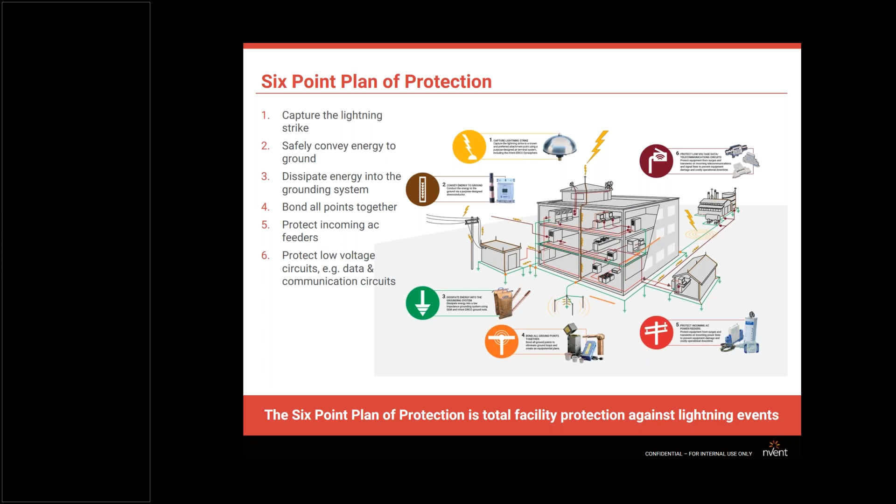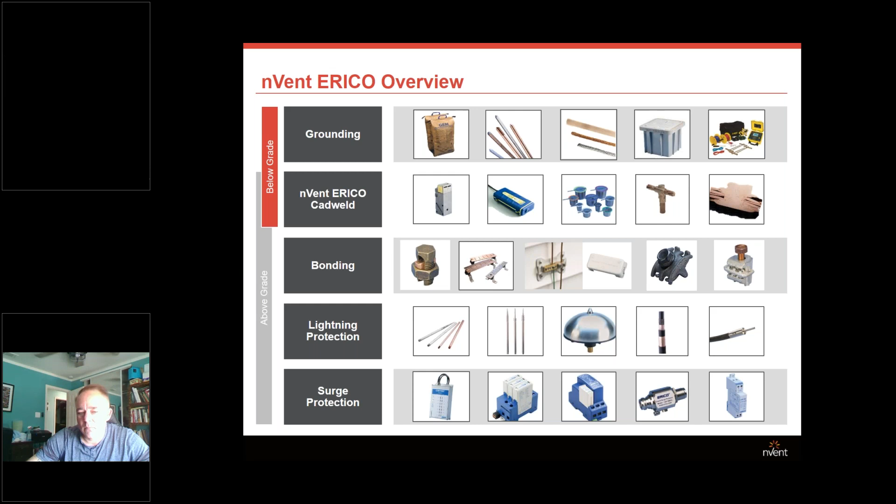And nVent ERICO offers all the grounding products, from the ground electrodes, the ground enhancement materials, the Cadweld exothermic connections. We offer the traditional blue tube and the new Cadweld Plus. We feature all the bonding products, which are your mechanical connectors and ground bars.

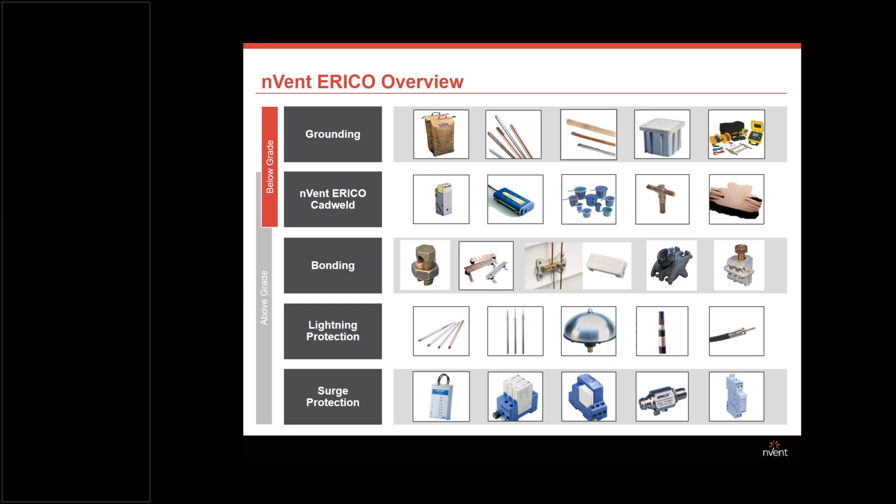We do the lightning protection, from what I mentioned a moment ago, from the Franklin rods to, the third picture there, the active lightning protection system, which actually sends out streamers to capture the lightning strike. And then we also offer the surge protection products from the facility entrance all the way to the datacom.

Grounding and bonding: why do you ground? Grounding is a connection, whether it's intentional or accidental, that grounds all the metallic and electronic equipment to the earth. And bonding is the permanent connection of all these metallic parts one to each other. So bonding is actually the joining of all the parts together. Grounding is where the energy is dissipated into the earth.

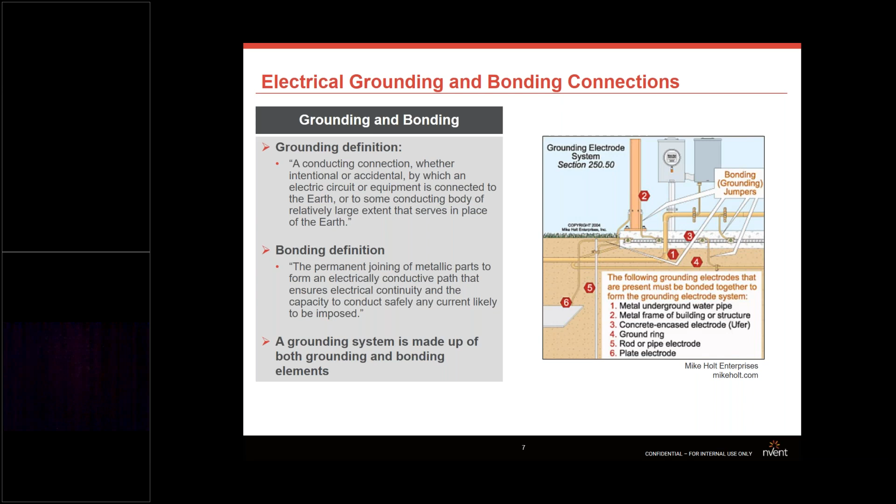And I'm going a little bit quick. We've got a lot of slides to go over. So please interrupt me if you have any questions, if I go too quick to make everybody understand. I apologize.

All right, Cadweld. A Cadweld exothermic connection is a process that welds copper to steel or copper to copper. It's an electrical connection caused by an exothermic process. It's a chemical reaction that releases the heat, and by releasing the heat, it's 4,500 degrees Fahrenheit. And what you get is a true weld where your conductors, or your conductor and the steel, the conductor and the ground rod, it actually fuses them together.

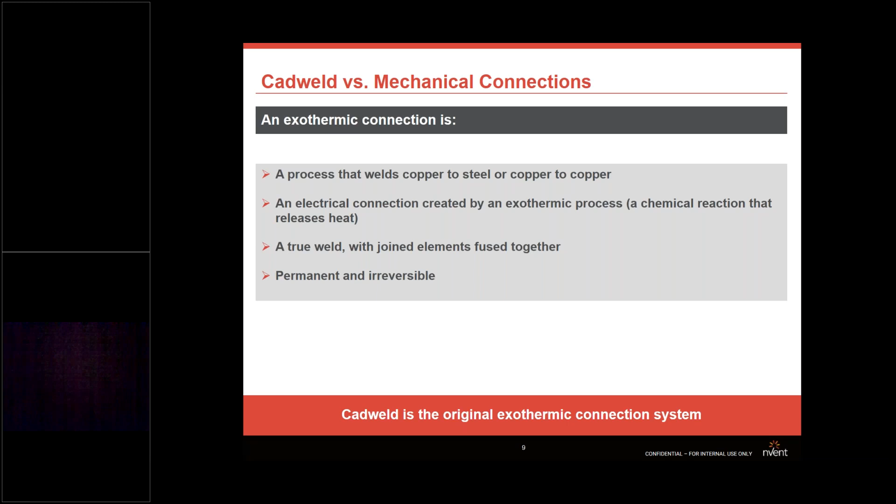So instead of making a connection, you're eliminating a connection. You have one molecular bond where everything is welded together in a solid copper connection. It is permanent and it's irreversible. The original Cadweld came out in 1938. It was invented by Professor Charles Cadwell. And all we did was drop the last L of his name and put a D to it, since it was a welding process.

And what we did was eliminate the one person having to take so much equipment onto a site. He was having to transport several hundred pounds of equipment to make this connection, and we cut it down to about 10 pounds of equipment. That includes the mold, the weld metals, the starters, everything. So we actually made it a lot safer, a lot easier for the person to do the connections.

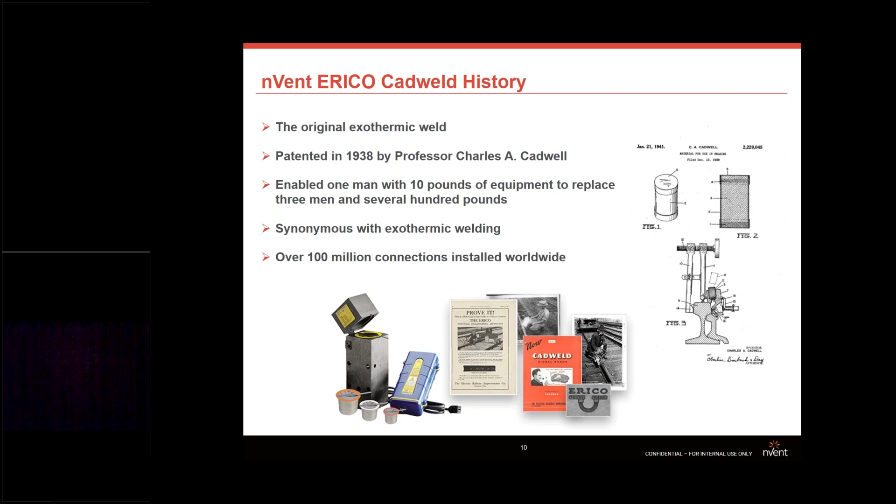And we are the Coca-Cola Kleenex of the grounding world. You'll hear a lot of people say, hey, I made a Cadweld connection, when they actually might be using one of our competitors. But we are synonymous with exothermic welding. We have made over 100 million connections worldwide of Cadweld installations.

Why do we Cadweld? There's no electrical power source needed. It's very lightweight and portable, like I just said. It's a very quick process. Until you see it made, it's a simple process, yet it's a very technical process. And it's the only way to weld copper cable.

And once you Cadweld two conductors together, they have the same current carrying capacity, so usually the connection does better than the conductor does. It is a permanent connection. It will not loosen or corrode, and it can be visually checked for quality, which is very important for the electrical inspectors.

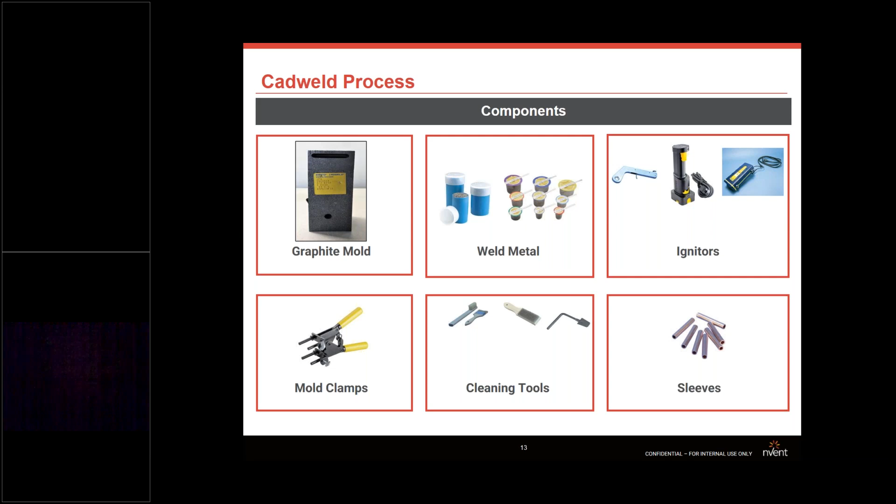And the blue tube, the old traditional Cadweld process: once the conductors have been placed in the mold and it's closed properly, you insert a disc, the weld metal pours in, and then at the bottom of the tube is a starting material, which is the same weld material. It's just ground much finer. You have to tap the tube, pour some into the weld metal and some on top of the mold.

You use the flint igniter, which is about 6 inches from the spark. It's about a 500-degree spark to ignite the weld metal, and then that will ignite the aluminum. The aluminum ignites the copper, and then as you see, as you open the mold, you have nothing but a solid copper connection of the conductors.

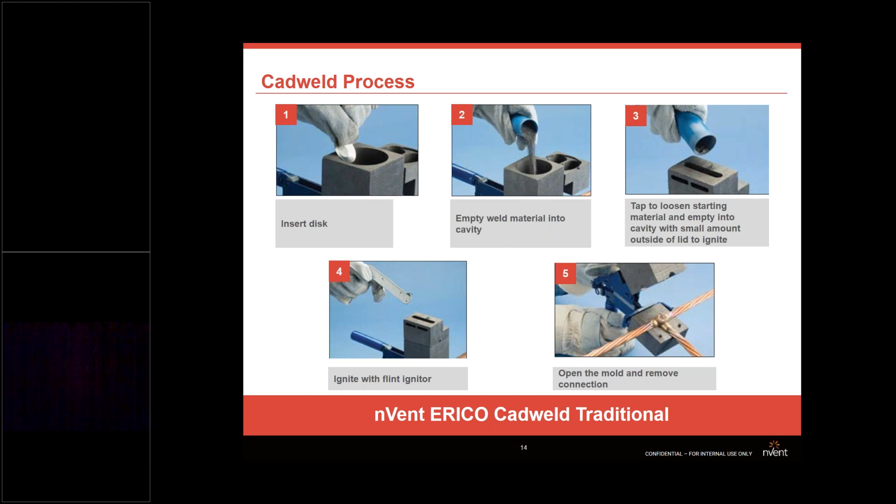The Cadweld Plus process is a much safer, cleaner process. The weld metal comes in a cup, looks much like a Keurig cup, and it has the igniter strip on it. The same process, you close the mold with the conductors in it. You drop the weld metal cup in. The strip inserts into the leads of the control unit.

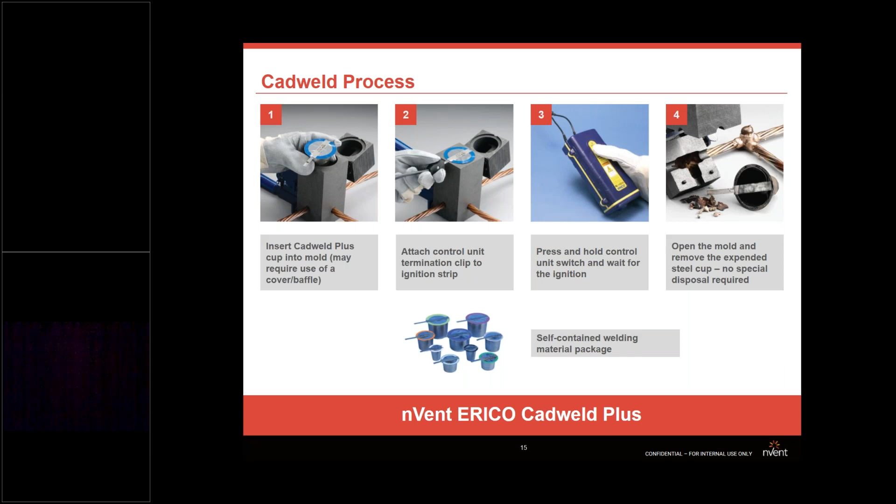Then you press a button for about 5 seconds for it to build a charge, which is a built-in safety feature. When you're making the connection, you don't want to accidentally bump the start button and have it go off and ignite the weld metal. So you have to hold it down for it to build a charge. Then it ignites the weld metal, and you have the same connection as you do with the blue tube. But you can be 6 to 15 feet away from the ignition, instead of 6 inches.

And then the OneShot has been around since 1959. It is exactly what it says it is. It's used one time. This is very widely used in the telecommunications industry. It's usually for a ground rod to a conductor, and the body is ceramic. It is not made out of graphite, so it is used one time, and then you can either break the mold off or just leave it on, whichever the electrical inspector prefers.

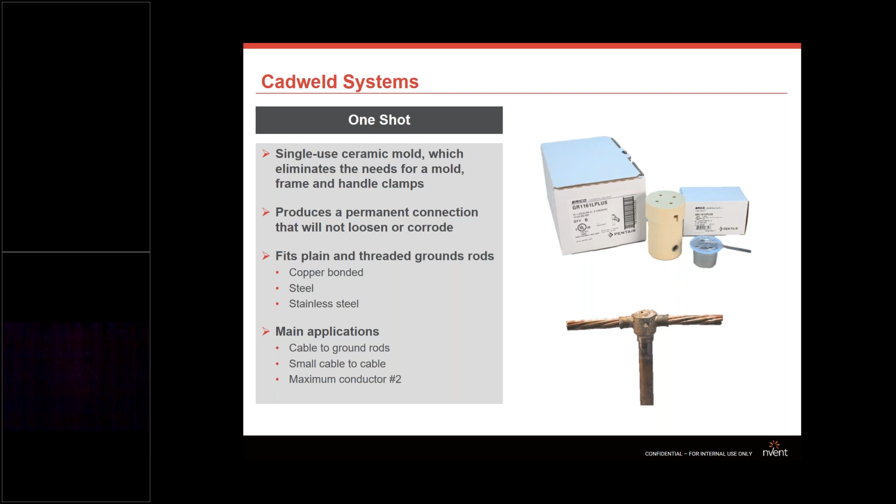And the ignition systems, like I mentioned previously, are the flint igniter for the traditional Cadweld and the control unit for the Cadweld Plus.

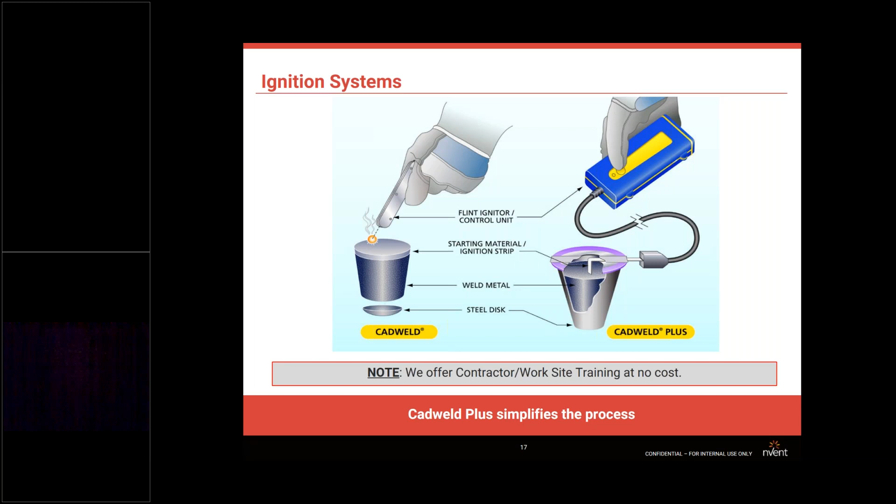Excuse me. The tools and accessories are the handle clamps, which are very important because we've had several instances where we have been called by contractors and end users who were having leakage issues. And a lot of the time they were not using the handle clamps. As you can see in the picture there, there's a clip that comes with the mold. That clip is for shipping and storage purposes only. That is not to hold the mold in place for making the connection. So the handle clamps are very important.

We have several different kinds. The most common is the L160. We also have the chain clamps whenever you're grounding, especially at a cell site where you're grounding each one of the posts to the ground ring. The chain goes around and holds the mold to the post to make the connection. When you're grounding to a flat steel surface, we have the magnetic handle clamps, which are at the bottom left. That holds the mold to the steel surface, and then you make the connection.

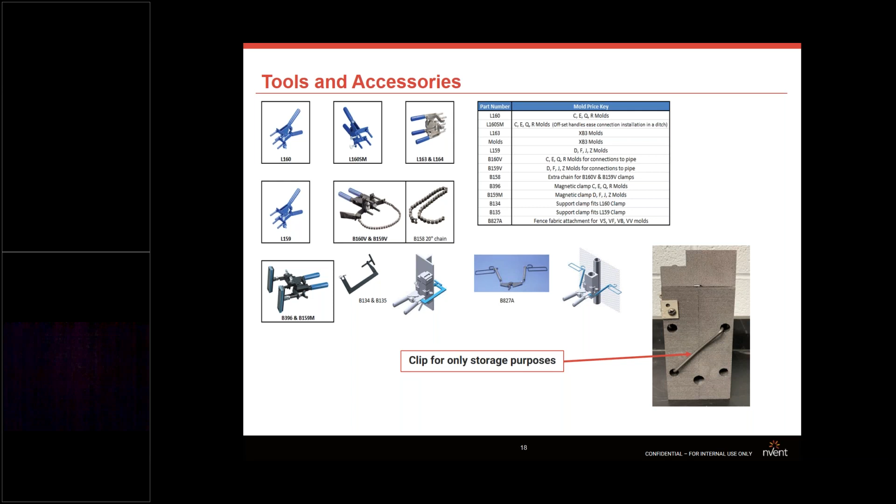The tools accessories are the flint igniter for the traditional. We sell the replacement flints, but the tool itself is so inexpensive, we just usually sell the tool when someone needs one.

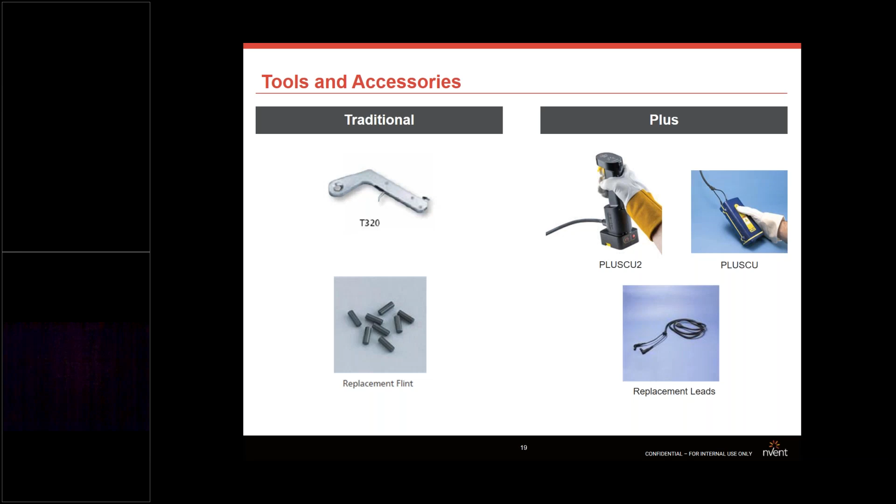The plus control units: the one on the right is the one that is available right now, the plus control unit. The new one that will be coming out the middle of June and will be in inventory is the plus CU2. It is much more ergonomically correct. It's much safer. It utilizes both the 8 AA batteries that come with it, or you can buy an adapter plate for a Milwaukee or an adapter plate for a DeWalt cordless battery. And then we also sell the replacement leads for those as well.

This is just a quick view of the new Cadweld Plus Impulse Control Unit. It's safety. It has the safety guard on the trigger, where you can't bump it, you have to flip the trigger guard up to press down on it. The power, like I said, we have the 3 types of power: the Milwaukee, the DeWalt cordless batteries, or you have the 8 AA batteries. The ignition light: when you depress the trigger, the logo there will light up, and when it gets to the last one, that's when it's built to charge up and will ignite the connection.

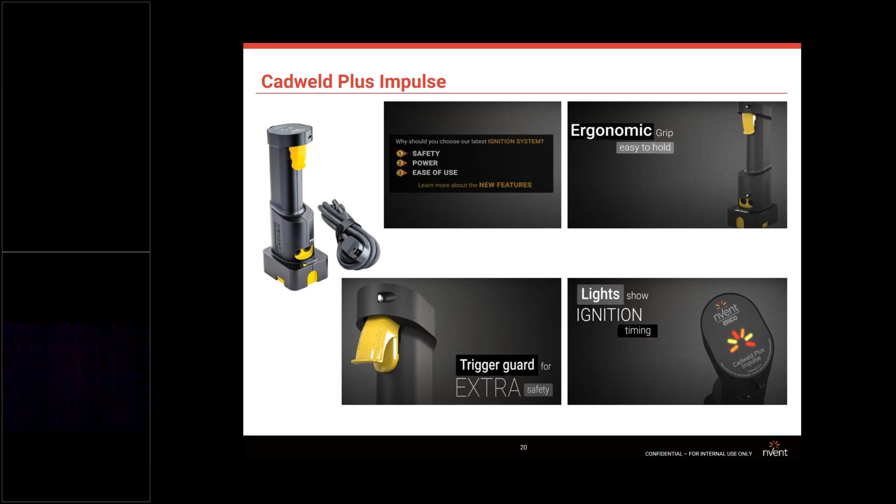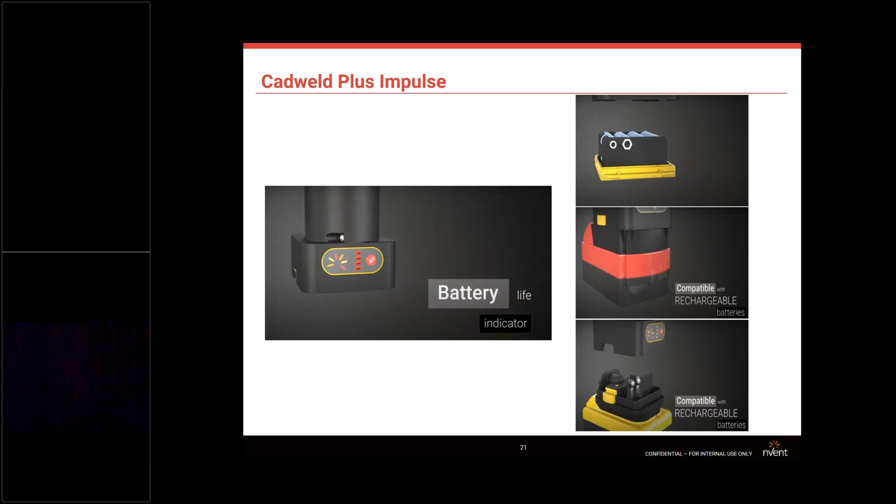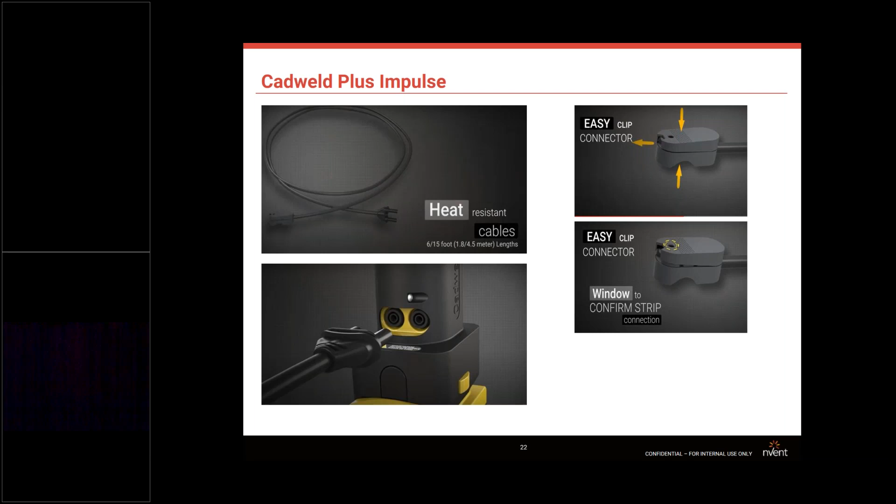And Oscar, well, before we go any further, I went quick there because we do have a lot of slides, but does anyone have any questions on Cadweld? Okay, well, Oscar, you may take over. Thank you, Melvin.

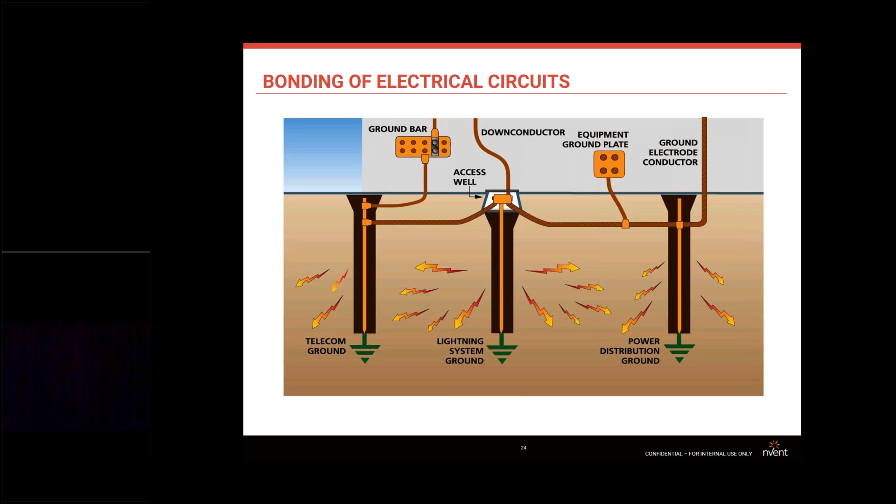ERICO has provided ground rods for many years, and it's been the biggest producer of ground rods in the world. So the ground rod basically is the point of exit or dissipation of all this energy captured and bonded together and transmitted through the facilities or equipment to the earth. What we can see here is how this energy is dissipated into the ground. It's equivalent to the roots of a tree, and the more you get away from the center, where the ground rod is driven, the more the voltage drops until it gets all the way down to zero.

Yeah, good one. Can you hear me?

Yes. A good way to think of how the energy is dispersed into the earth is if you stand on the side of a calm lake and you throw a rock into the lake, where it hits the water, the waves are the strongest, the biggest, and as it gets further away, they get smaller. That's the same way the energy is dissipated to the earth. At the point of contact, it's the strongest, and as it gets further away from it, it gets much weaker.

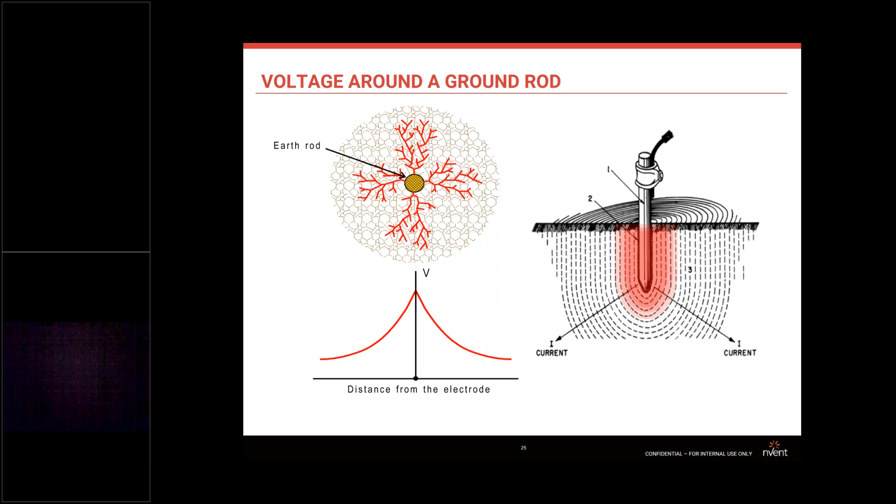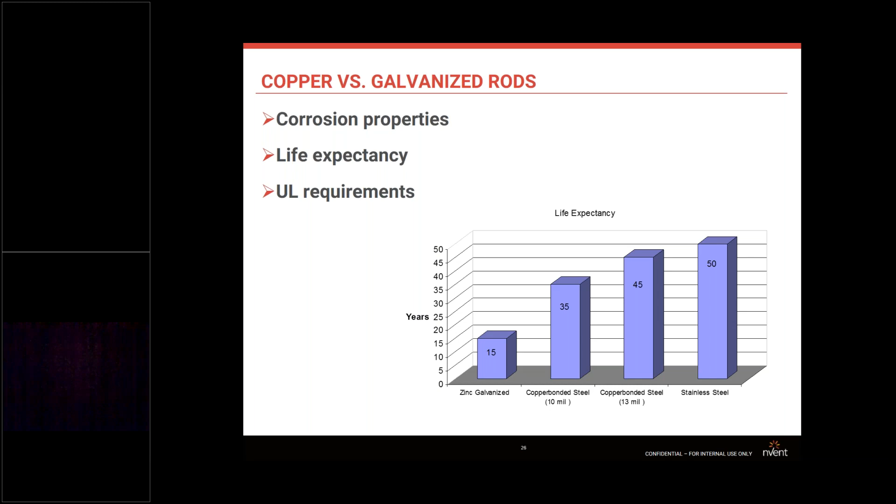Now, not a new product actually, an updated product that has been in the market for utilities, is the Hammerlock. With this new 5G era we're starting now, the increase of small cells around the cities is going to be rapid, with fast deployments and probably a lot of small contractors. And what happens is, with all these people not trained by Cadweld on exothermic welding, we need something fast and easy to use for these contractors to make the grounding correctly. So we came up with the Hammerlock, which goes on top of the ground rod, and basically it's a mechanical connection with a piston that will connect copper.

It's made all of copper and will connect the ground wire, and it will make a permanent connection to the ground rod. Now, all these carriers are looking for four different types of configuration for the ground rods. So the first one is when you get two ground rods in line, trying to get 25 or less ohms. And if you cannot get that, you can use the triangle version, which AT&T likes a lot.

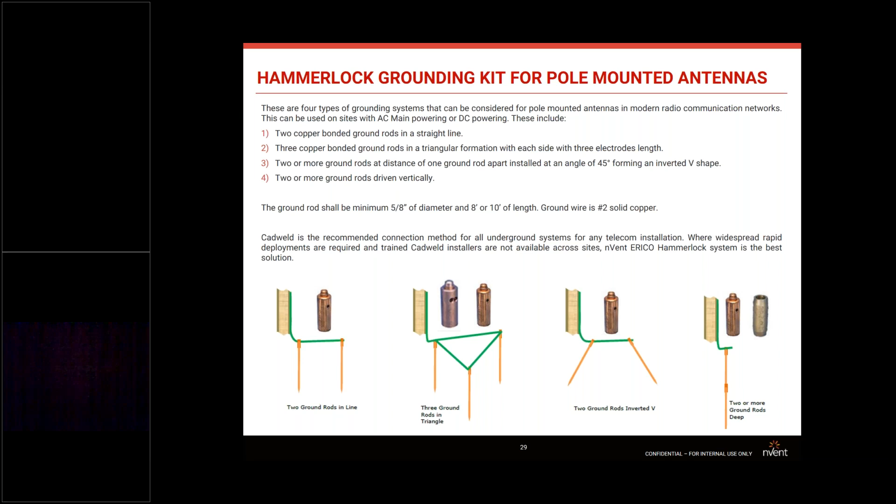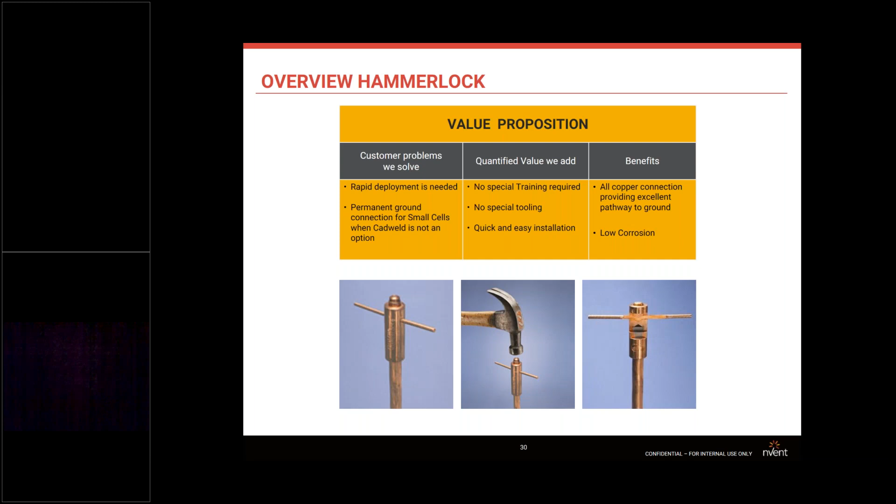Now, basically, the Hammerlock will solve rapid deployment when needed, right? It creates a permanent connection for these small cells when you cannot use Cadweld for any reason. And the benefit is that it is an all copper connection. Because there are no dissimilar metals, you get low corrosion exposure. If you see the third picture on the bottom, you'll see how the ground wire, the piston and the Hammerlock, which is all copper, connect as just one body. And there's no special training or special tooling needed; it's a quick and easy installation. You just need a hammer and drive it down into the ground.

Now the parts of the Hammerlock and how it works: you've got the ground rod hole, so you place the Hammerlock on top of the ground rod. You try to get the ground rod driven to knee high or a little bit higher, so you have enough room, because you're going to start smashing the top of the Hammerlock to make the connection. While you're doing that, you're also driving the ground rod into the ground. Then you've got the ground wire hole where the ground wire passes through to make the connection, and the piston.

Now, when you're smashing the piston, you won't go more than needed. When it sits there and you see the first edge of the piston, it won't go any further. So you won't damage the connection by smashing it too hard or too much.

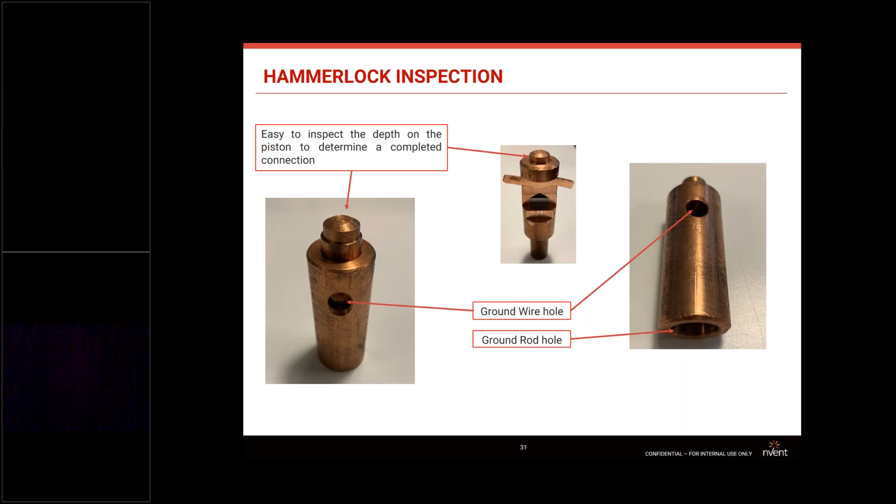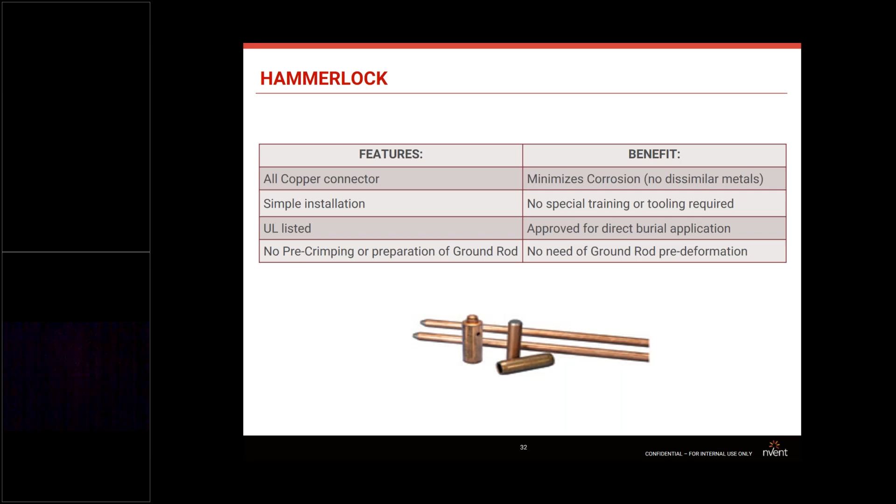I mentioned some of this already, but the features of the Hammerlock are an all copper connector, whose benefit is minimizing corrosion. It is a very simple installation, as you saw in the pictures. There's no special training or tooling needed. It is UL listed, so it's approved for direct burial. And I know with compression connections, you need to pre-crimp and prepare the ground rods. In this case, you don't need to spend any time on that. You go directly to applying the Hammerlock on top of the ground rod and driving it.

Now, one thing that is really important is the Hammerlock will fit tight on the head of the ground rod. So we have to be really careful not to mushroom or damage the head while driving the ground rod into the ground. Therefore, we will need either a ground rod driver or a ground rod driver sleeve if we're using just a hammer. And if we're using power tools or a rotary hammer, we also sell ground rod drivers for those. So the ground rod doesn't get damaged or mushroomed, and the Hammerlock will fit perfectly.

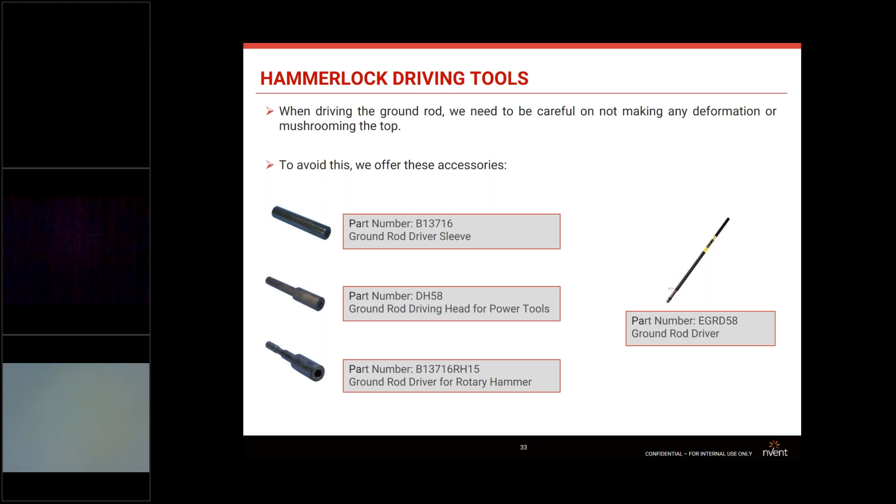In summary, it is a great alternative to Cadweld. It is useful in really widespread applications. You don't need to train personnel to use it, and you will get a very good electrical and mechanical connection.

Now, GEM and QuickFill are ground enhancement materials, used when the space is short or the type of layout is complicated, to help us get lower resistance. We use what we call GEM, which is a ground enhancement material. It's a cementitious conductive material, and it's an environmentally sensitive solution to lower your resistance. It does not dissolve, decompose, or leach out, and as a consequence you get a type of theft deterrent safety, because it will protect your ground rod and your connection.

It is ideal for areas of poor conductivity, I mean, rocky ground, mountain tops, or even sandy soils. It improves the electrical connection directly between the conductor and the soil to dissipate the energy, and as a consequence it minimizes the ground resistance. Also, this will promote protection against corrosion, because the GEM will absorb most of the moisture generated close to the ground rod or the connection.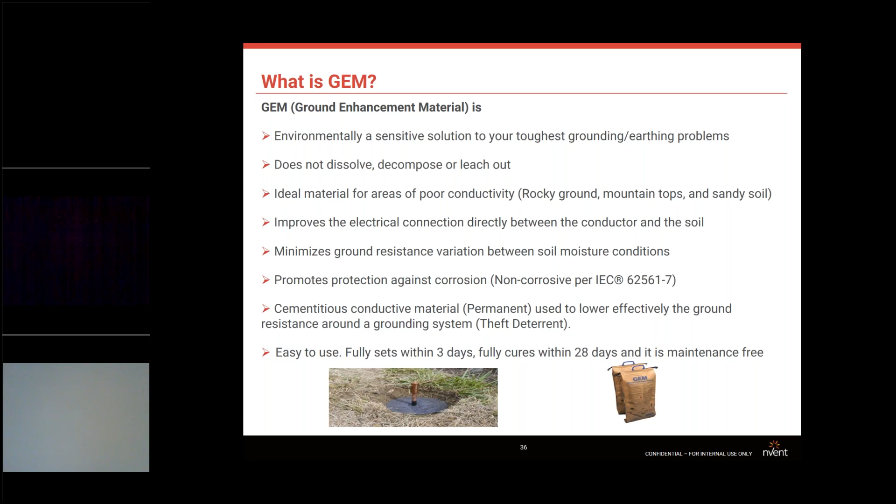And it's easy to use. You can get it fully set within 3 days, because you need to wait to cure the cement part of it. This is an example picture of how it's prepared and poured. It's really easy. You just need the mixer, the GEM, and water. You mix it together, and then you can use it in a trench or wherever you are making the connection.

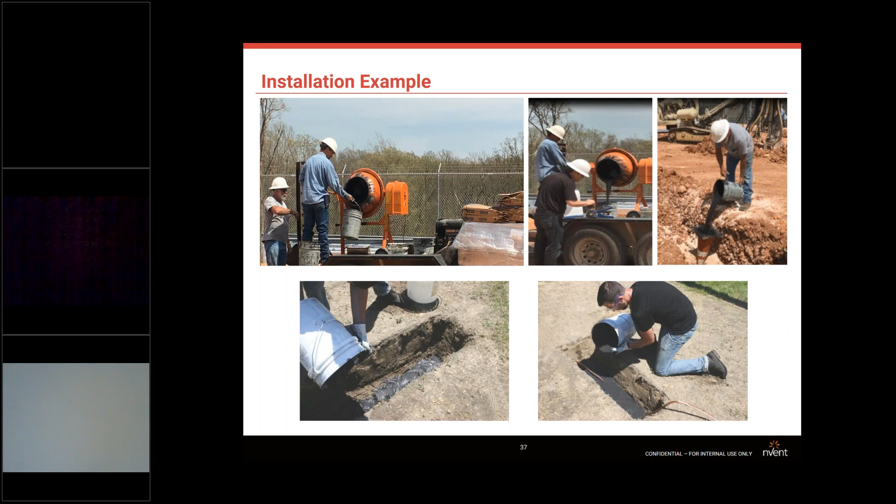Now we have QuickFill. The difference with QuickFill is it's a ready-to-use product, and also a low dust product. So when getting to the site is complicated, and getting water and material there is complicated, QuickFill could be a very good option. It can be installed below freezing temperatures because it doesn't need any liquid. It's fast and easy to install, and you can get your resistance measurements taken immediately after installation.

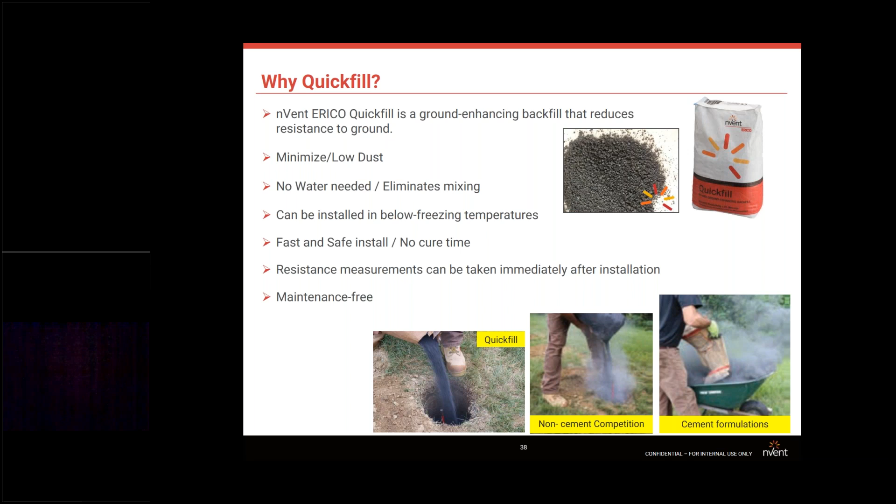Now, the applications: where low dust and cleanliness are really important, and where fast installation is really critical, like a small cell application, street enclosure, or even a cross-connect cabinet. Remote locations where cement mixing equipment or water is difficult to transport, like on top of a mountain or a cell site really far away from everything in the middle of nowhere. QuickFill is a good solution, and it's easy to move from site to site.

Now, this is a comparison between GEM and QuickFill. GEM has carbon and cement. QuickFill is just carbon, and GEM will get you better resistivity per centimeter than QuickFill. Both have passed the leaching test. But QuickFill is low dust, so you don't need to use a dust mask on site to pour the product. But when you use GEM, you should use a dust mask.